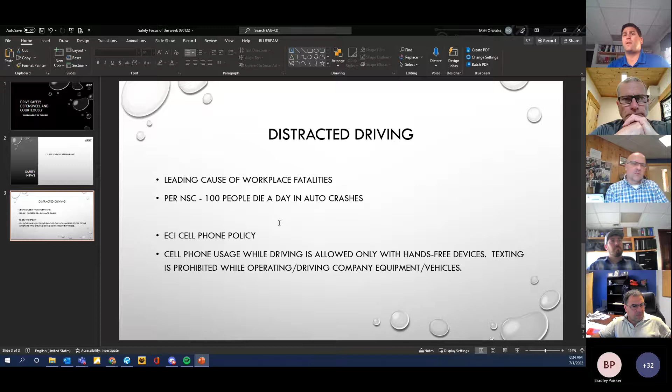So again, best practice: following distance, or controlling your space on the roadways, you always want to have enough time to react. But the biggest thing is making sure you're paying attention and following these 10 tips that I'm going to highlight right now.

This is from the National Safety Council, the top 10 truths about cell phone and distracted driving. Multitasking is a myth, our brains cannot process two mentally demanding tasks at once. The area of our brain that processes moving images decreases by a third when talking on the phone. Cell phone users are 4 times more likely to be involved in a crash. Drivers talking on cell phones miss seeing half of what is around them, including red lights, stop signs, and stopped traffic.

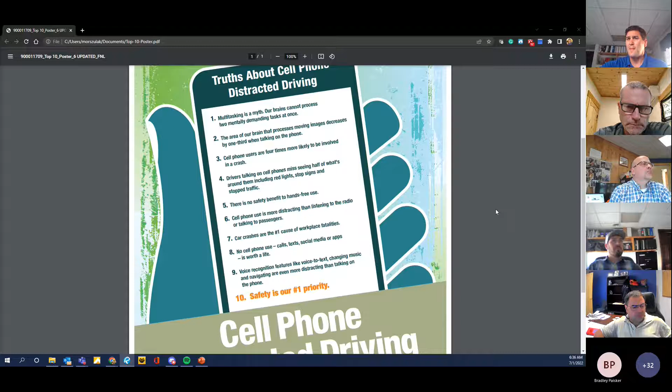Number 5, there's no safety benefit to hands-free. When we're driving we should really be focusing on driving, not taking time to make phone calls and catch up. Really paying attention to the task at hand is best practice. Cell phone use is more distracting than listening to the radio or talking to passengers. Car crashes are the number one cause of workplace fatalities, like we mentioned. No cell phone use, calls, texts, social media, or apps is worth a life. Number 9, voice recognition features like voice-to-text, changing music, and navigating are even more distracting than talking on the phone. And the last one, again, safety is our number one priority.

Let's really try to eliminate cell phone use while driving, because it's a huge distraction. As we talked about all morning, it's really not worth it. Pull over, take the 5-10 minute conversation, then get back on the road so you can focus on the task at hand, getting where you want to go safe and sound without getting in an auto accident. Again, 100 people die a day in auto crashes, and distracted driving is the number one cause of those fatalities. So let's really focus this week, and throughout your career, on making sure you're putting the phone down and focusing on operating your motor vehicle.

Ken, do you have anything to add?

Well, only that last night on the way home, later last night, I went to the Industrial Ave paving site, and headed home about 9:30. At the 4 corners, stop sign each direction in Williston, down by my place before you get on Oak Hill Road, someone was going about 40 miles an hour and apparently never saw the stop sign. Nothing happened, they went through, road was clear, but boy, scary to think what could have happened at that kind of speed, because I think they were going way over the speed limit and just went right through that intersection. So probably was either some form of distracted driving.

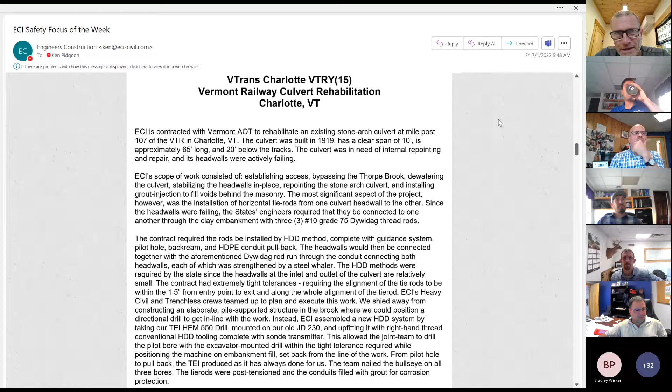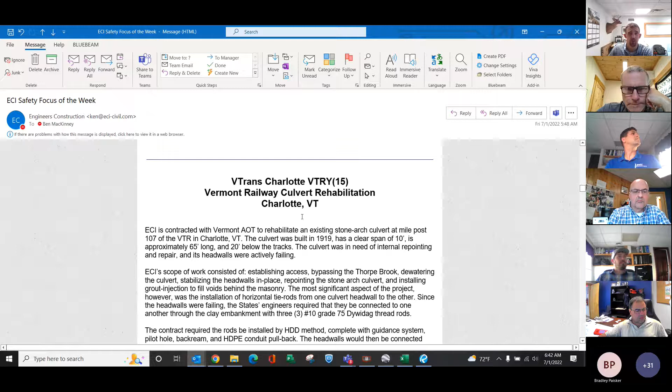So ECI is contracted with VTrans to rehabilitate an existing stone arch culvert at milepost 107 on the VTR North Vermont Railway in Charlotte, Vermont. The culvert was built in 1919, has a clear span of 10 feet, and is approximately 65 feet long. It's 20 feet below the tracks in an embankment fill section over the Thorpe Brook. The culvert was in need of internal repointing and repair, and the head walls on each end were actively failing.

ECI's scope of work consisted of establishing access, bypassing the Thorpe Brook, dewatering the culvert, stabilizing the head walls in place during the work, repointing the stone arch culvert, and installing grout injection to fill the voids behind the masonry inside the culvert. The most significant aspect of the project, however, was the installation of horizontal tie rods from one culvert head wall to another, tying the inlet and outlet concrete head walls through the embankment to each other. Since the head walls were failing, the state's engineers required that they be connected through the clay fill embankment with 3 number 10 grade 75 Dywidag thread rods.

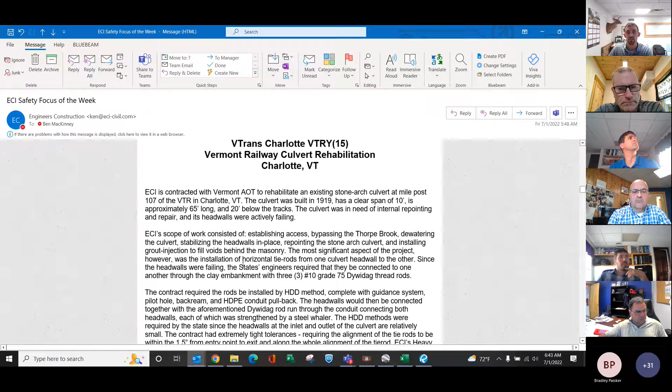The contract required the rods to be installed by HDD method, complete with guidance system, pilot hole, back ream, and HDPE conduit pullback. The head walls would then be connected together with the Dywidag rods through the conduit, connecting them both through a steel whaler that would spread out and give lateral strength, so it's not just a nut bearing on the concrete. That was a big heavy channel section - I forget exactly what it was, but it was over 100 pounds a linear foot.

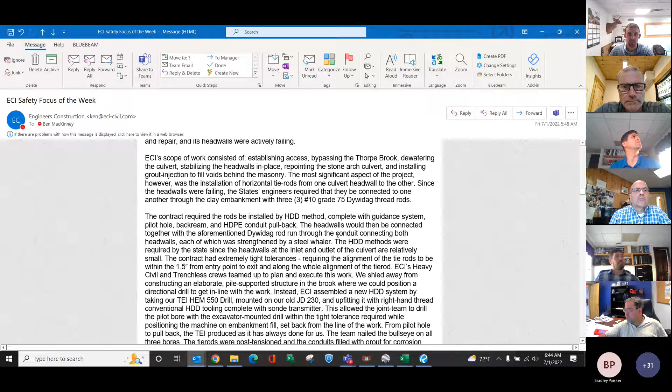The HDD methods were required by the state since the head walls at the inlet and outlet are about 65 feet away and relatively small. We had the technology to go in there and do conventional, not guided, drilling, but to hit the tolerances they were looking for, we really needed to use HDD methods, and we were required to anyway by the contract.

The tolerances were really tight, so we were allowed a maximum of one bar diameter of deviation, about 1.5 inches, from entry to exit along the whole alignment of the tie rod. ECI's heavy civil and trenchless crews teamed up to plan and execute the work.

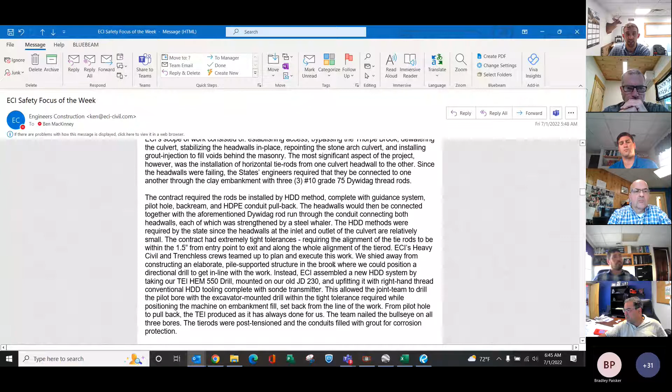We shied away from constructing an elaborate pile-supported structure so we could get a directional drill in line with the work, and instead we opted to essentially build our own new HDD system by taking our TEI 550 drill mounted on our John Deere 230 and upfitting it with right-hand thread conventional HDD tooling, complete with Sonde transmitter.

So we're taking the classic horizontal directional drill tooling, something that's asymmetrical - a steerable head, a steerable bit. Pat essentially welded that onto a T40 striker so we could run the smaller diameter rods. I think it's some of the tooling we run, like the JT10 and some of the smaller drills.

This allowed the joint team to drill the pilot bore with the excavator-mounted drill, sitting back on the embankment. I can show you a picture of what I'm talking about. Rather than being in line with the work like we would with the directional drill, we could actually sit on an embankment fill we made in the dry and drill the work that way. I don't have a picture of that, but there's one later on.

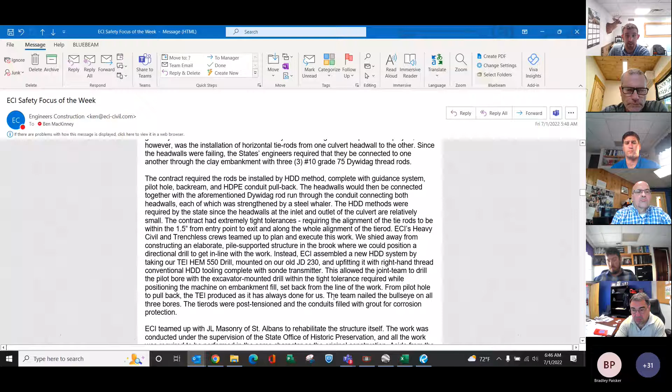From the pilot hole to pullback, the TEI produced as it always has. The team nailed the bullseye on all 3 bores. The tie rods were post-tensioned and the conduits were filled with grout after installation for corrosion protection.

On the repointing scope, ECI teamed up with JL Masonry of St. Albans to rehabilitate the structure itself. The work was conducted under supervision of the State Office of Historic Preservation, and required to be performed in the same character as the original construction. They were looking at samples, stone coloration, matching everything even though it's not in a very visible spot. It was important to VTrans that everything look authentic, and it did. It came out really nice.

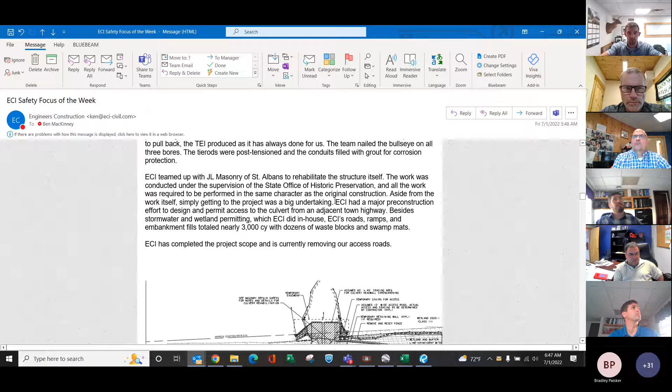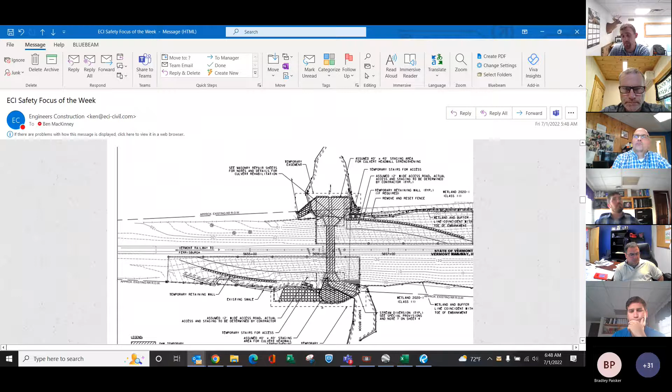Here's a plan view - you can see the culvert here, with a pretty high embankment. Yeah, 20 feet is just from the tracks to the top of the culvert. From that to the bottom of the brook, it's easily another 10. So probably a good 30-foot embankment.

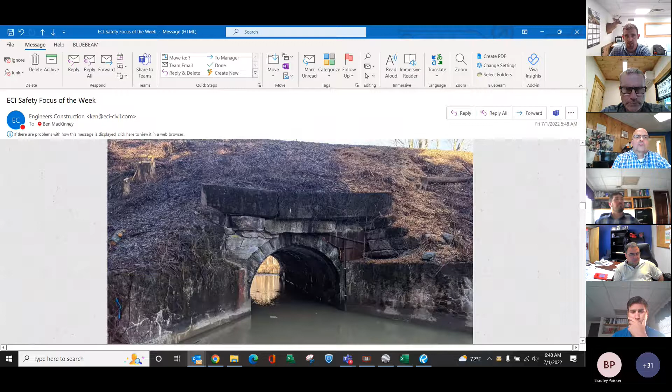There's a picture pre-construction, so you can see where somebody's cobbed some steel in there, and they're clearly having issues with it.

Not a lot of velocity here, and you're essentially at lake level, which is good and bad. We were concerned that a really wet spring, with lake elevations exceeding 100 feet, would create a backwater situation for us. We didn't see that - the snowpack this year was minor, and it's been relatively dry.

For bypassing, we were able to do a simple but robust, pretty significant super sack cofferdam with medium diameter HDPE pipe through it, and then a diesel pump and a 3-inch electric pump to get rid of residual water. Part of that was so we could work in the dry, and we had some work down below water level, and it was also a contract requirement.

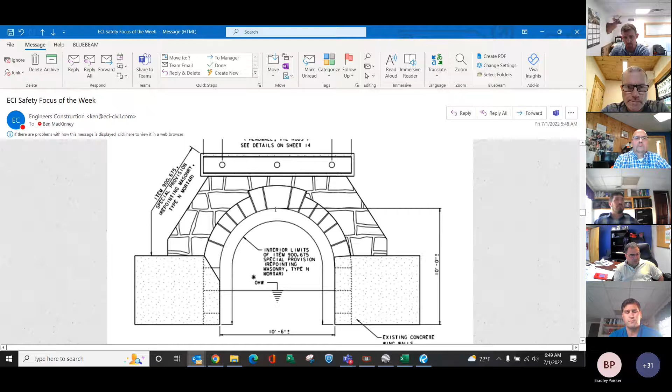The state was concerned with grout and mortar entering the brook. You can see the elevation of the head wall - this is the new whaler with the 3 tie rods, and they show the repointing work, and some pointing on the outside as well.

You can see that they've mapped each rock on the inside and pointed to different spots. So in addition to repointing, we also had some actual repair where we had to source similar stones and fit them in. That was done by JL Masonry.

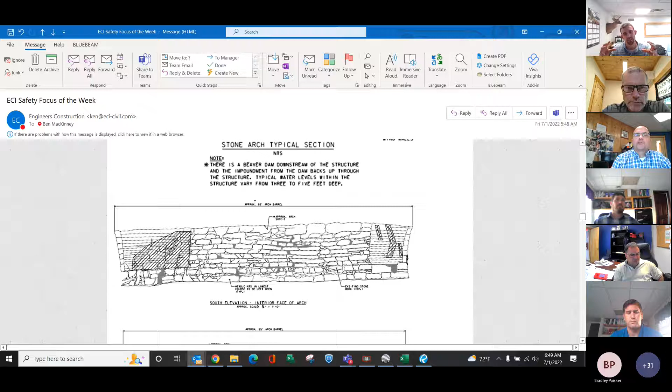And then there was also some grout injection, with quite a bit of overhead and vertical concrete work on the inlet and outlet where the culvert had been extended. That wasn't really masonry - that was some refacing that ECI did ourselves. And then we also had voids to fill back behind the blocks themselves.

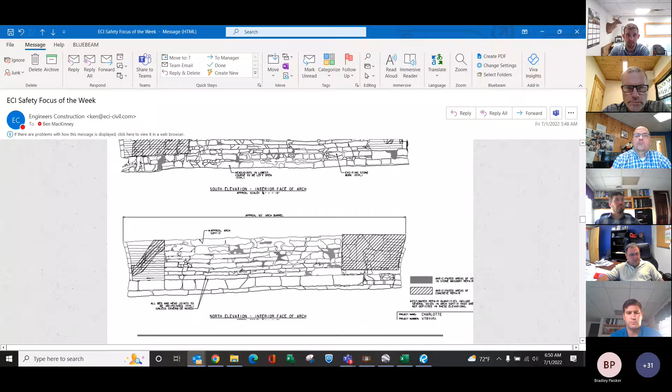They're calling it flowable fill. It's not really flowable fill - they've got these conceptual grout injection ports, which you'll see a picture of later.

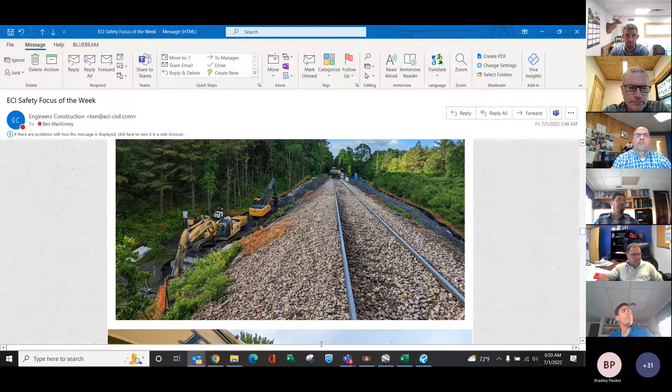That's the 230 there. So you can see where that machine can sit back and drill, probably a good 20 plus feet from its center pin, at 90 degrees through the head wall, and complete the HDD work.

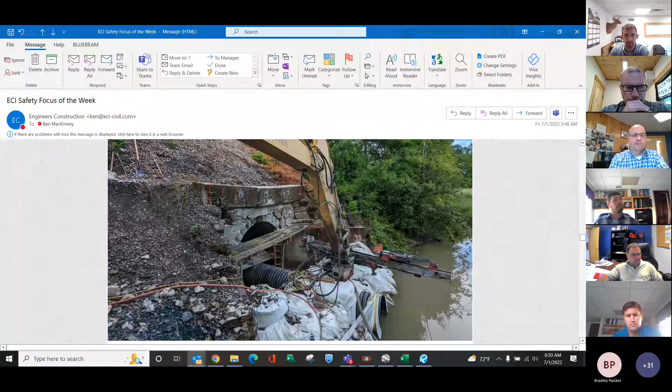There's a nice picture. Looks like that's on drilling day, one of the drilling days.

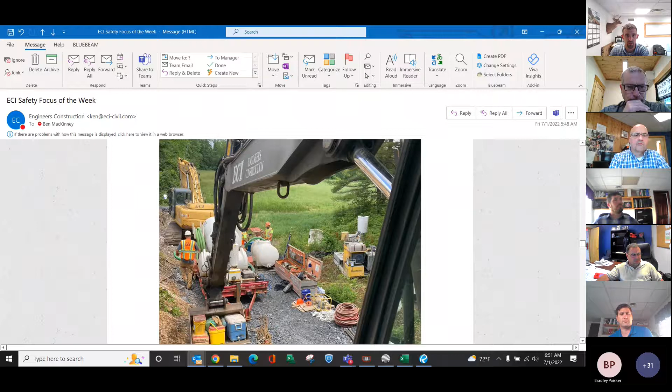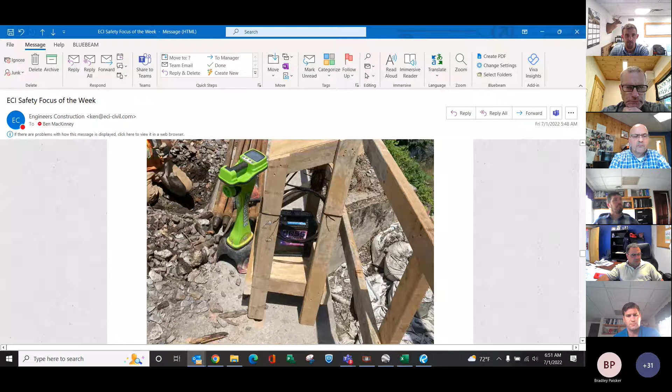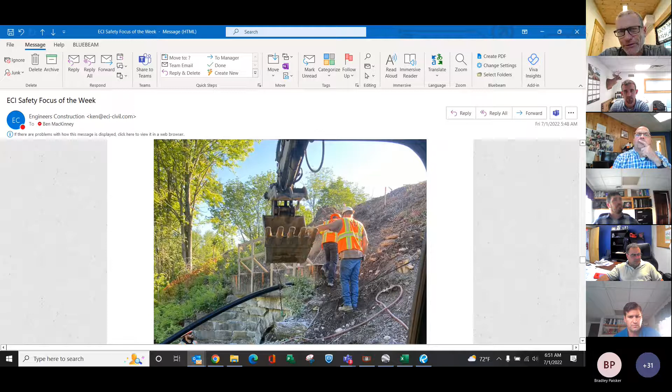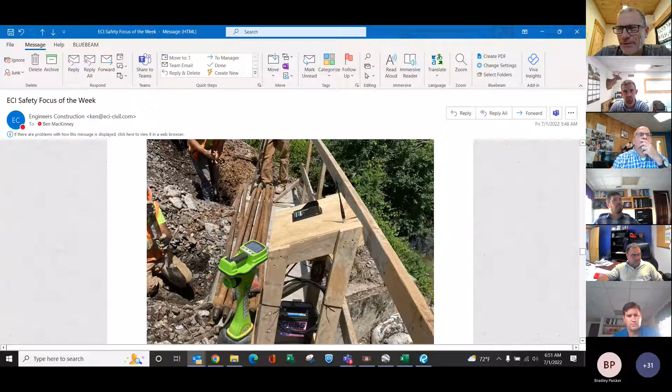Yeah, that's right. And so with Carter locating and Ken drilling, we also had the rest of the team supporting the operation, and had a full-time survey presence to keep us online.

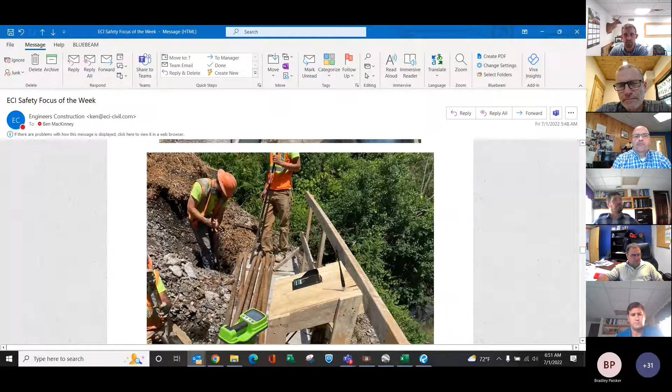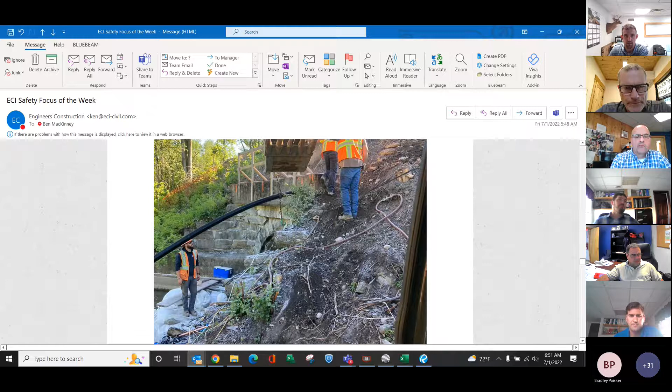That's pulling HDPE back through. So you can see daylight through it - good sign. Yeah, the tolerances they had were probably a little excessive. We were nervous that we would hit them, but it was a moot point because it all worked out.

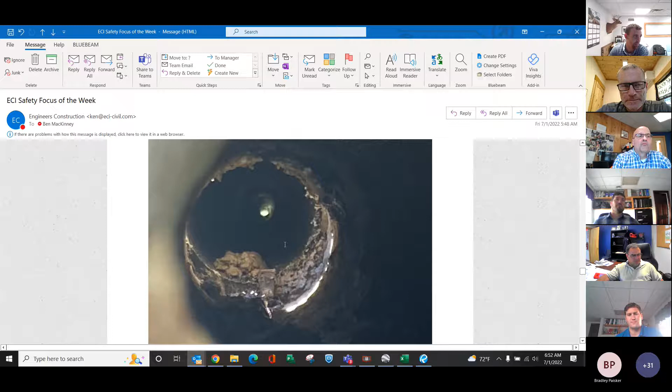See that big whaler getting hung on the outlet head wall there.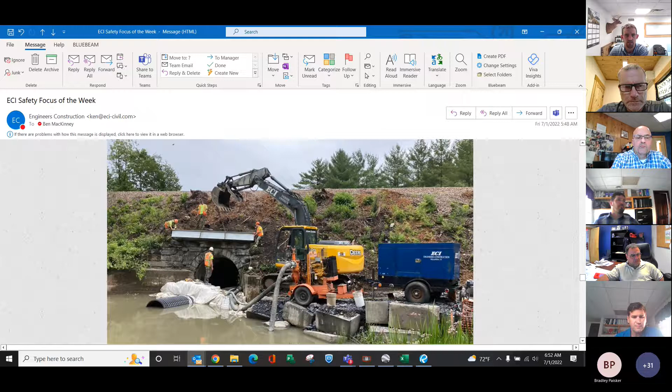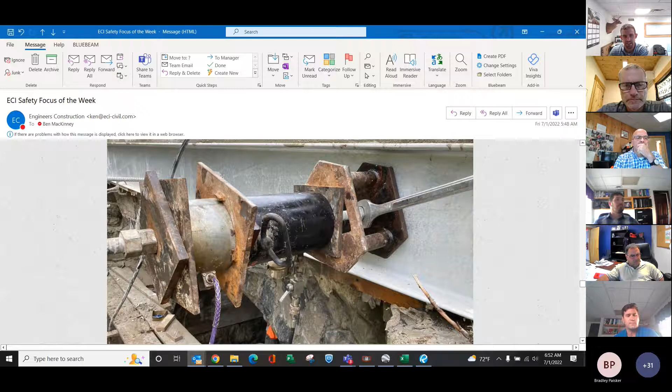The post tension requirement is pretty light for number 10 grade 75, only 9,000 pounds, but kind of a seating load. Yeah, I probably could have got it by turn-of-nut method, but even with the coarse threads.

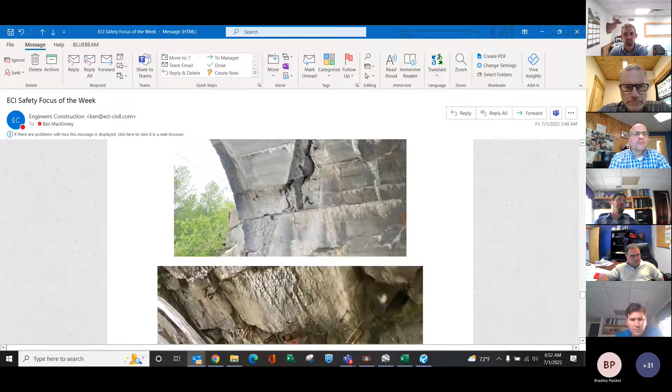So you can see the saw cuts at some existing concrete work at the interface with masonry. So they require these grout injection ports - didn't really say what they wanted.

So we kind of thought of the old trick of sealing up a manhole where you've got water running in, plugging in a copper pipe and then crimping off the copper pipe at the end. Kind of what we did - we used a supply and a return copper line at each void, pumped the grout into the copper, and when we got return we crimped them off and cut them flush.

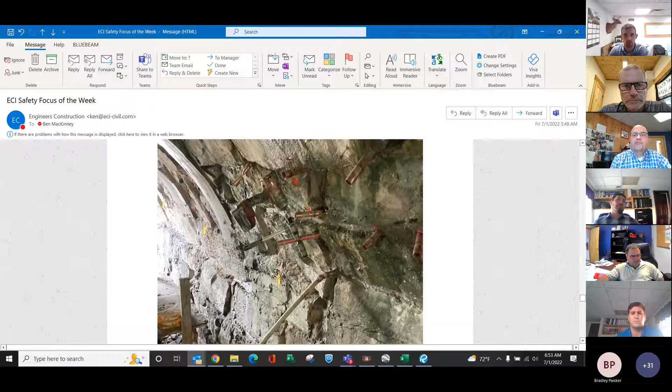Just using a simple hand pump for grout. Towards the end you see the guys in the culvert working on some overhead repair.

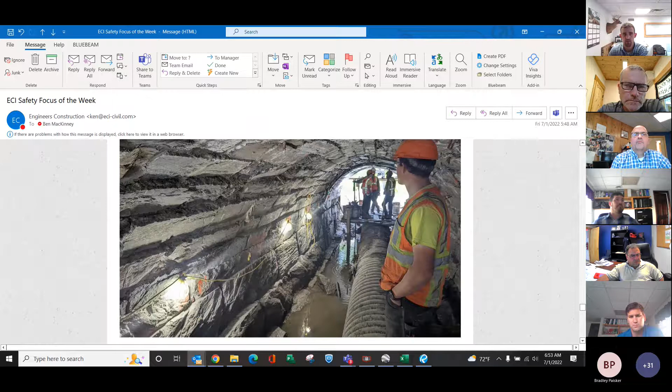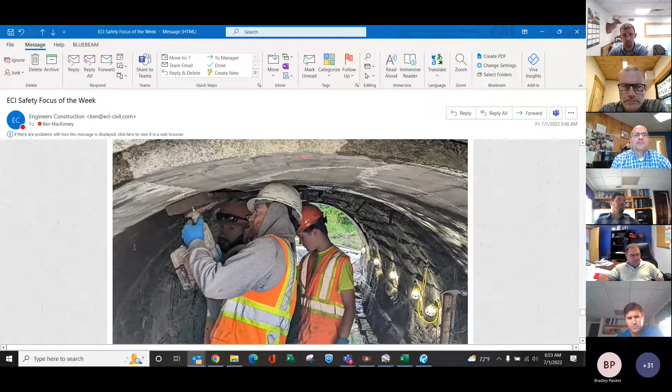Using a radial form board here, actually came out really nice, good finish, much better than troweling. There it is - pretty much the finished product. Cofferdam removed, whaler in, 3 tie rods.

One of the head walls made us really nervous and kind of looked like it was going to fall on us. So we actually did drill some grouted anchors that are now out of service, or at least hidden behind the whaler. But we did have some regular tieback anchors, or maybe even soil nail anchors, in there just to mitigate that risk.

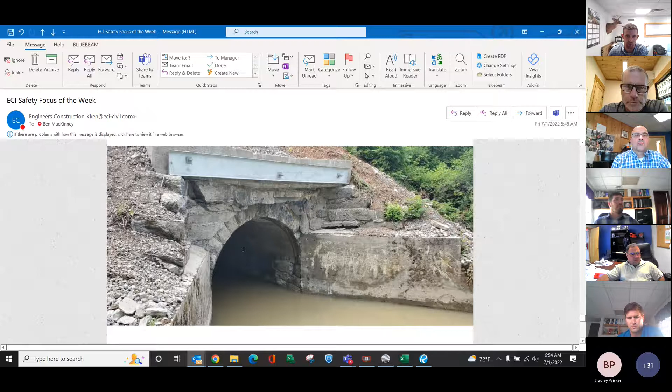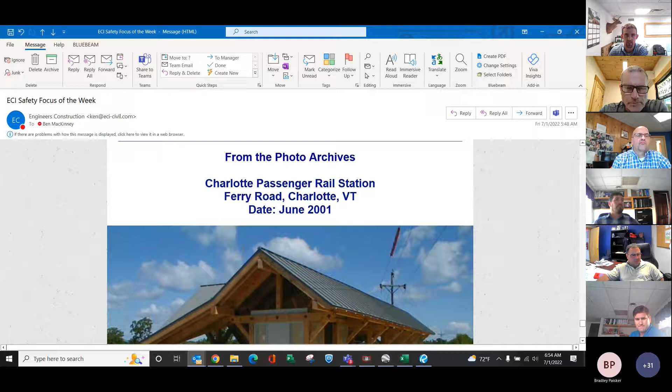From the archives, we have the Charlotte Passenger Rail Station, not too far away from this job on Ferry Road. We also did a substation not too far from here, if I remember right - right in the background, yep. Some of the power lines overhead probably go to the substation.

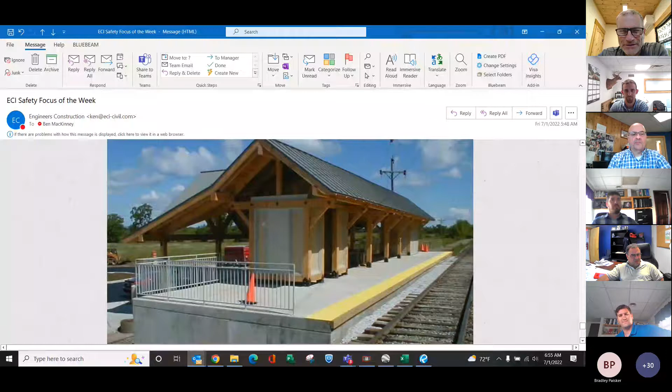I don't know if they're going to use this with Amtrak running or not. It seems like they should. At first they hadn't used it - we did the work and then it kind of just sat there. Yeah, it hasn't, I don't know if it ever really got used. I think it was called the Champlain Flyer. It might have been in service for a month or two, I can't remember now. Back in 2001, okay.

Good, well thank you, Ben. Pretty cool project there, the guys did a great job out there.

It looks like a great, interesting job, and that was pretty cool that we were able to bring that 230 with the TEI drill in to do HDD type installation methods. Yeah, it's fun when we get to put our heads together with two unique crews that are good at certain things and put their skills together and make something happen.